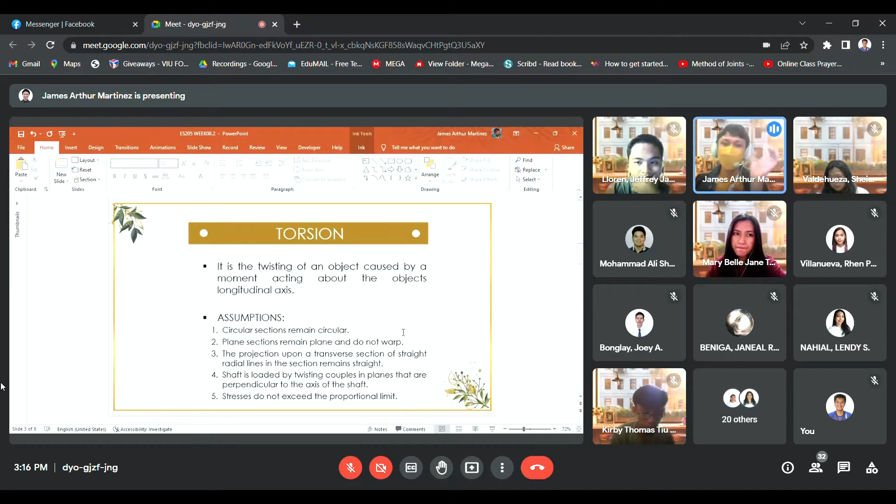So I'm about to present to you the equations and formulas that will be used in dealing with torsion problems here in engineering mechanics. Again, only circular cross-sectional area will we consider. Now we have here the angle of twist, which will be expounded later. I will show you a video with a very detailed explanation, crystal clear, with simulation.

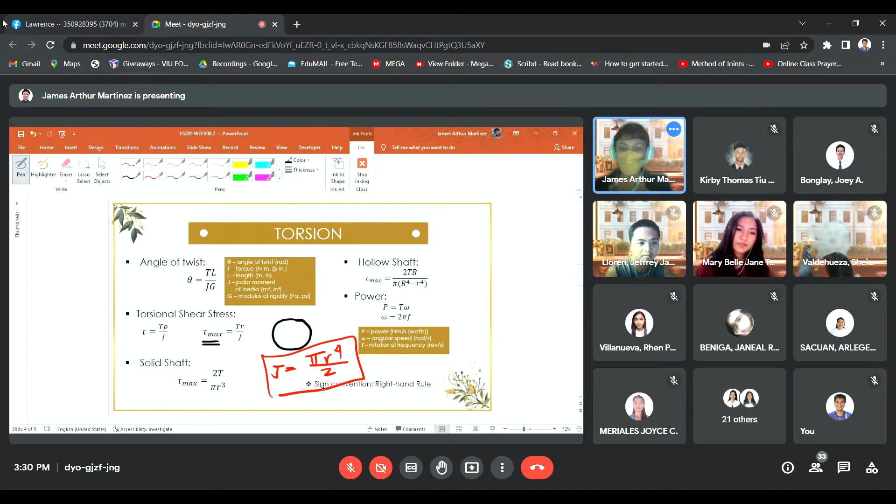Okay, so for sign convention, we will be using the right hand rule. Later I will show you what our sign convention is for this right hand rule. So for now, I will present to you the fundamental concept and principle of torsion, explained very clearly with a 3D simulation so it will be easily understood after watching this explanation. So let me just share my screen.

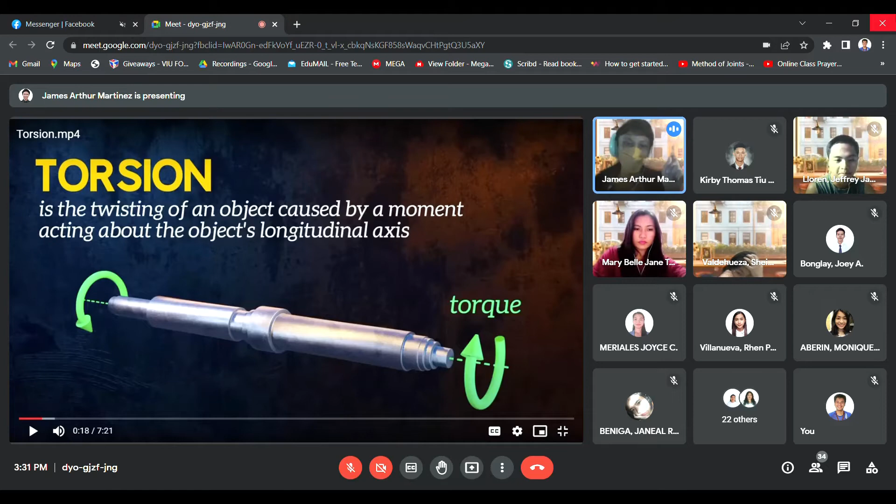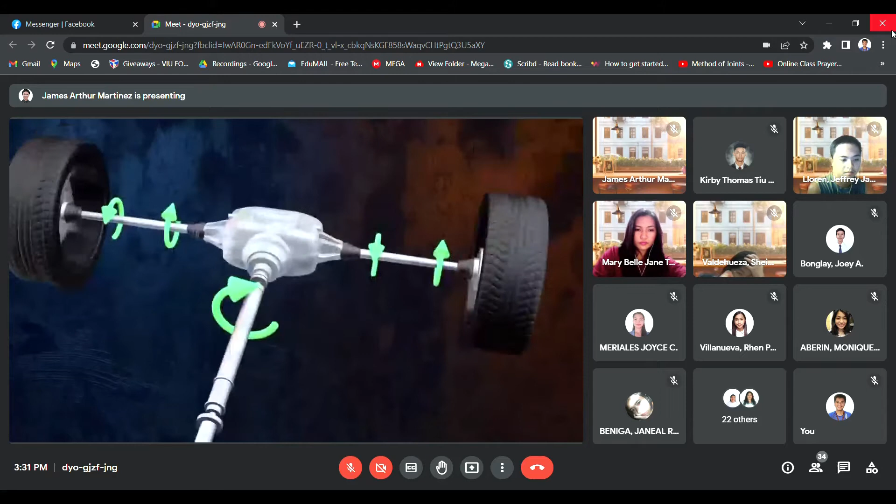...transmission shaft, which is used to transmit power by rotation. This could be the drive shaft and axles, used to transmit power from the engine of a car to the wheels, for example, or the shafts used to transmit power from the blades of a wind turbine to its generators.

Let's explore what happens when we apply torque to a circular bar. We can see that the applied torque causes the bar to deform by twisting. An interesting thing we can observe is that individual cross-sections of the bar do not get distorted by the twisting. We can imagine that the bar is made up of multiple individual discs, which rotate relative to each other when the torque is applied, but do not deform.

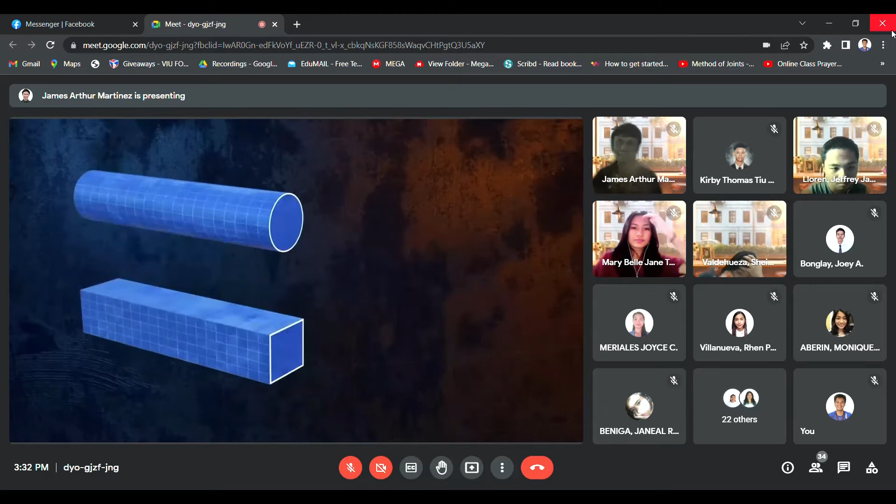This is only true because the cross-section of the bar is axisymmetric. A bar with a rectangular cross-section is not axisymmetric, and so torsion results in warping of the bar cross-sections.

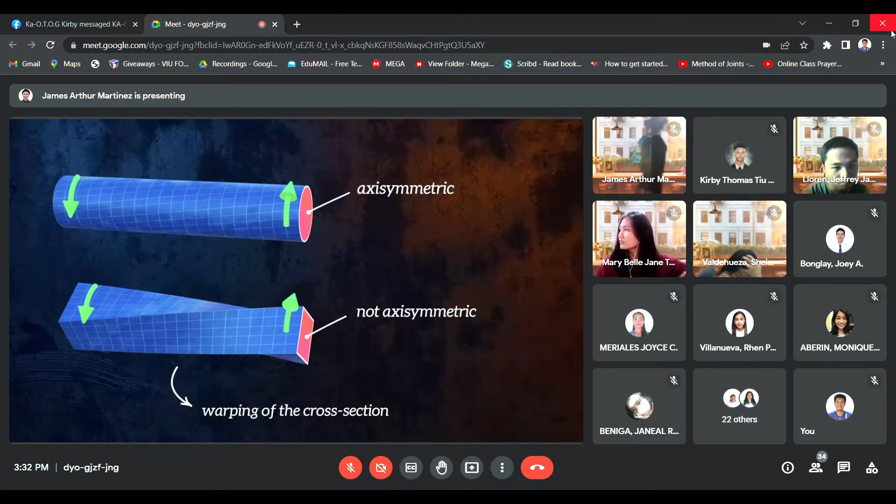This warping is complex, so in this video we will keep things simple and only consider torsion as it relates to circular bars. Let's fix our bar at one end, and track how a line between point A and point B deforms as we apply a torque to the other end.

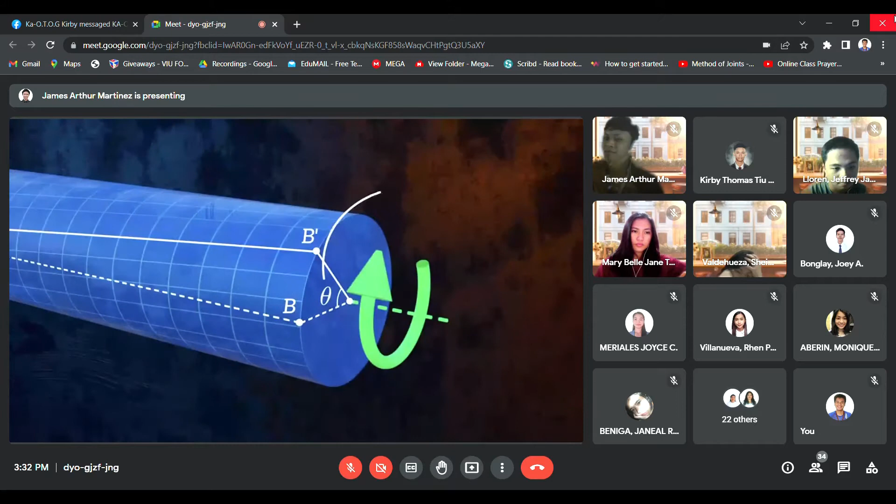The applied torque causes the free end of the bar to rotate by an angle theta. This is called the angle of twist. It varies linearly from 0 at the fixed end of the bar to theta at the free end of the bar. We can calculate the angle of twist using this equation.

It is a function of 4 parameters: the length of the bar L, the applied torque T, the shear modulus G, which is a material property, and J, which is the polar moment of inertia.

So, what is the polar moment of inertia? It defines the resistance of a cross-section to torsional deformation, due only to the shape of the cross-section. The polar moment of inertia for a hollow bar, with an outer radius RO and an inner radius RI, can be calculated using this equation.

Setting the inner radius to 0 gives us the equation for a solid bar.

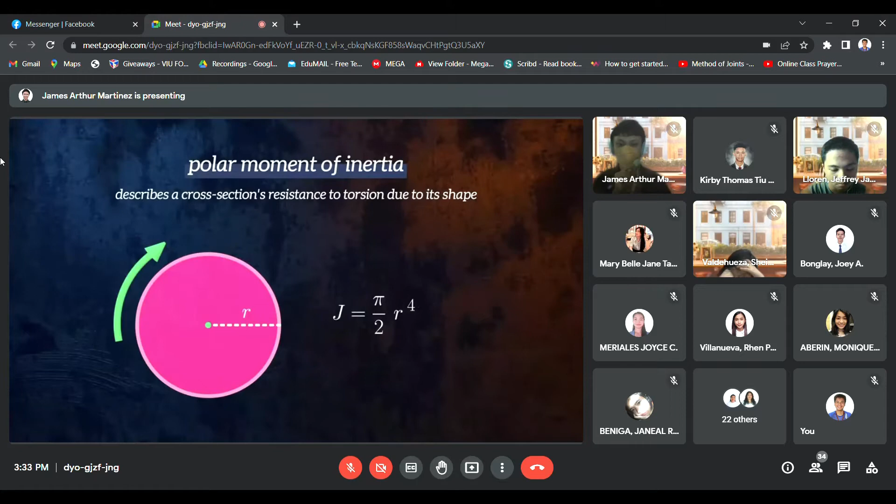One neat thing about the equation for the angle of twist is that it gives us a way to determine a material's shear modulus G experimentally. If we apply a known torque to a bar of known length and cross-section and measure the resulting angle of twist, we can use that information to calculate the material's shear modulus G.

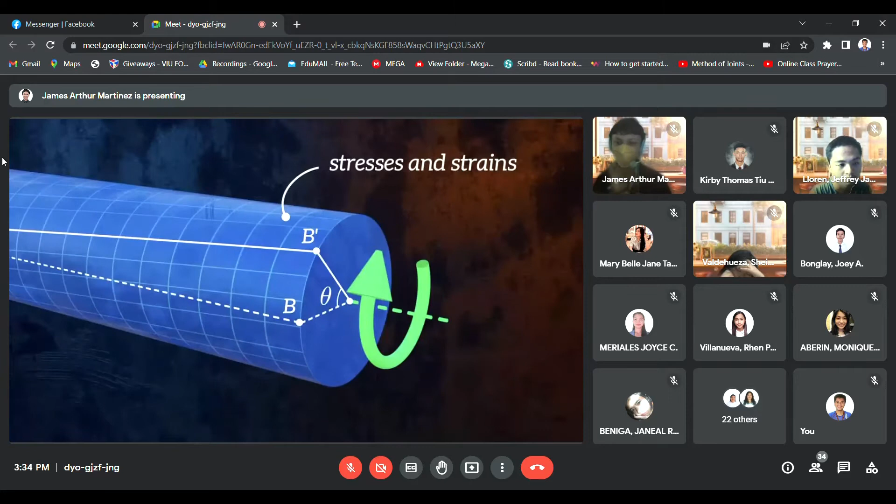Torsion generates stresses and strains within the bar, which we need to be able to calculate so that we can make sure our bar won't fail. To figure out how to calculate these stresses and strains, we can start by observing how a small rectangular element on the surface of our bar deforms. The element is initially rectangular, but when the torque is applied, it gets distorted.

Let's take a closer look. Because the bar is axisymmetric, we know that individual cross-sections will rotate but won't get distorted, so the sides CF and DE of the element will only move vertically along the lines shown here. After the torque is applied, the angles of the element are no longer 90-degree angles. This gives rise to a shear strain, which corresponds to the angle you can see here.

We can calculate the shear strain by considering only the geometry of the bar in the deformation. It corresponds to this angle between AB and AB prime. We can use trigonometry to derive an equation for shear strain. For small angles, gamma will be approximately equal to the tangent of gamma, which makes it equal to the length BB prime, divided by the length AB. AB is the length L of the bar.

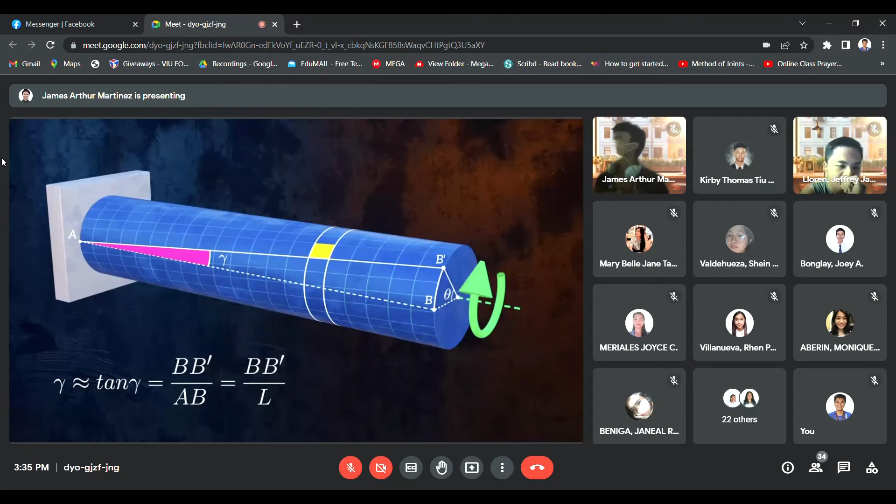We can calculate the length BB prime by realizing that it is the arc length of a circle with a radius r, covering an angle equal to the angle of twist, theta. So the shear strain is equal to the radius of the bar multiplied by the angle of twist divided by the length of the bar. But what about inside it?

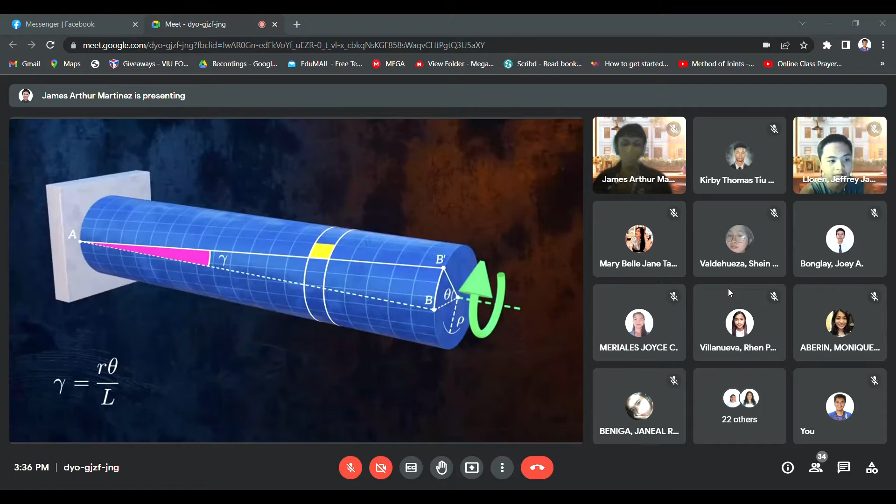It turns out that the shear strains increase linearly with the distance from the center of the cross-section. So if we define ρ as the radial distance from the center of the cross-section, we can replace r in this equation with ρ, to give us an equation we can use to calculate shear strain due to torsion at any point within the bar. That's shear strains covered. But what about shear stresses?

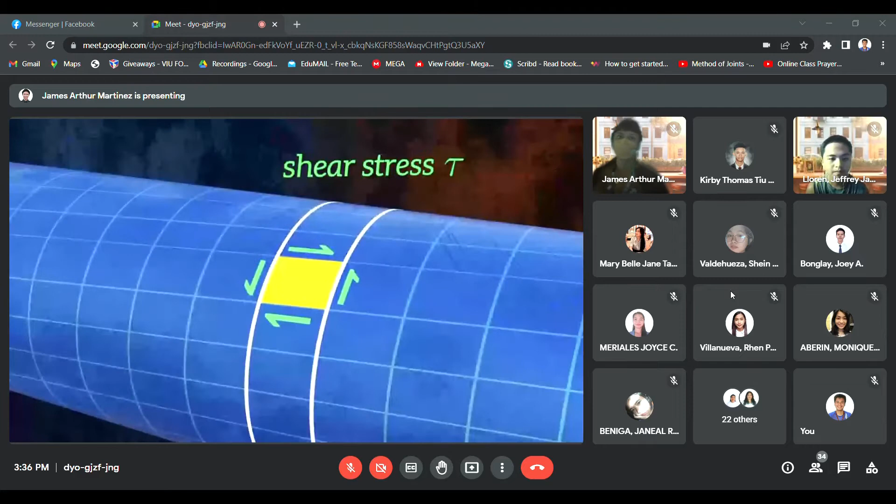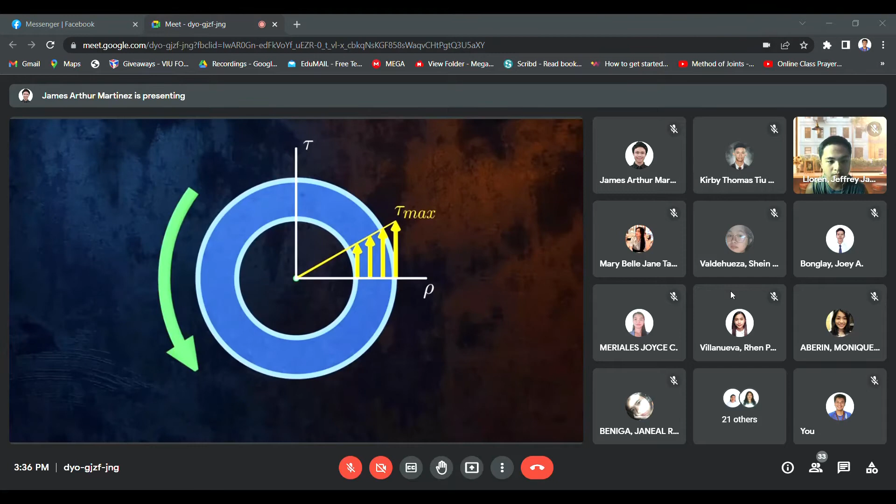Like the shear strains, shear stresses increase linearly with the distance from the center of the cross-section, with the maximum shear stress occurring on the outer surface, as you can see here. This is true for a solid bar, but also for a hollow bar. This is useful to know because it means that hollow bars are way more efficient at carrying torsional loads, since the central part of a solid bar is only resisting a small part of the total load.

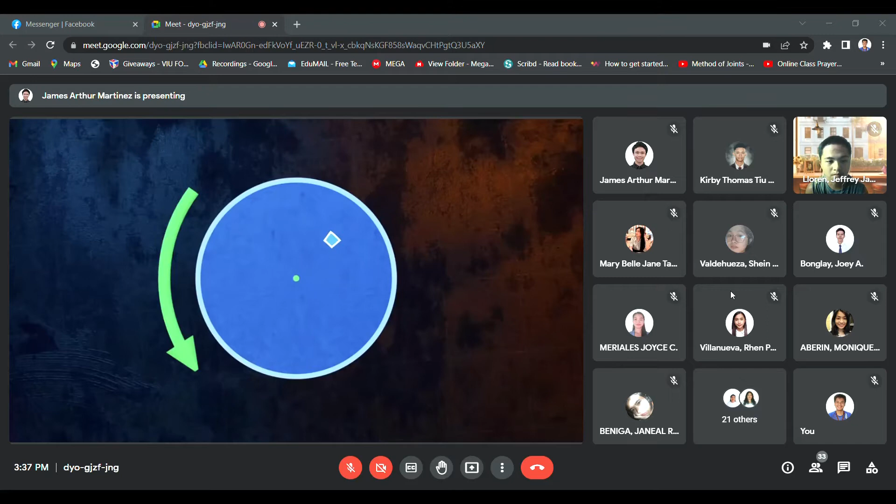Let's consider a small element within our cross-section that has an area equal to dA and is located at a distance ρ from the center of the cross-section. The internal force acting on this element is equal to its area, dA, multiplied by the shear stress τ. We can use this information to work out an equation for calculating the shear stresses.

The moments caused by the internal forces acting on all of the elements within the cross-section must sum up to be equal to the torque T. Otherwise, equilibrium is not maintained. We can represent that mathematically by this integral.

We know that the quantity τ divided by ρ is a constant, because the shear stress varies linearly with the distance from the center of the cross-section. So we can rearrange the terms and move τ over ρ out of the integral. It turns out that the integral we now have on the right is actually the definition of the polar moment of inertia, so we can replace it with the letter J, and we can rearrange this to get an equation for shear stress.

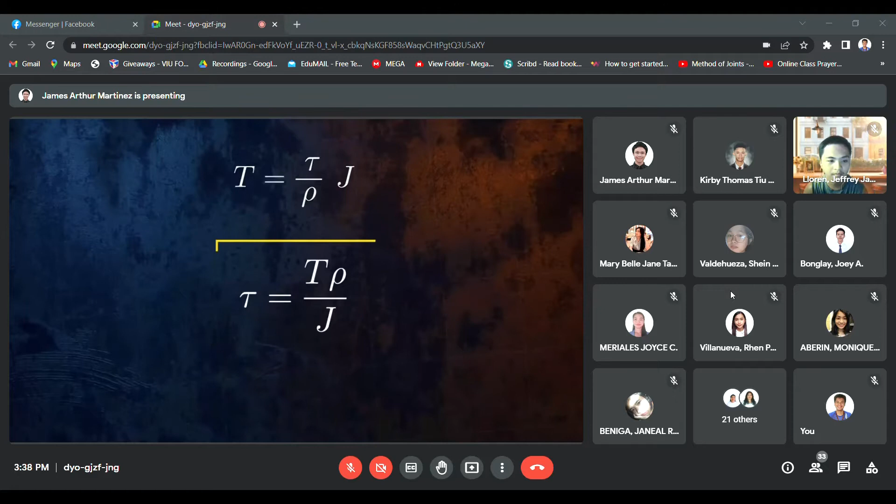The shear stress is a function of the torque T, the distance ρ from the center of the cross-section, and the polar moment of inertia J. It's quite a simple equation.

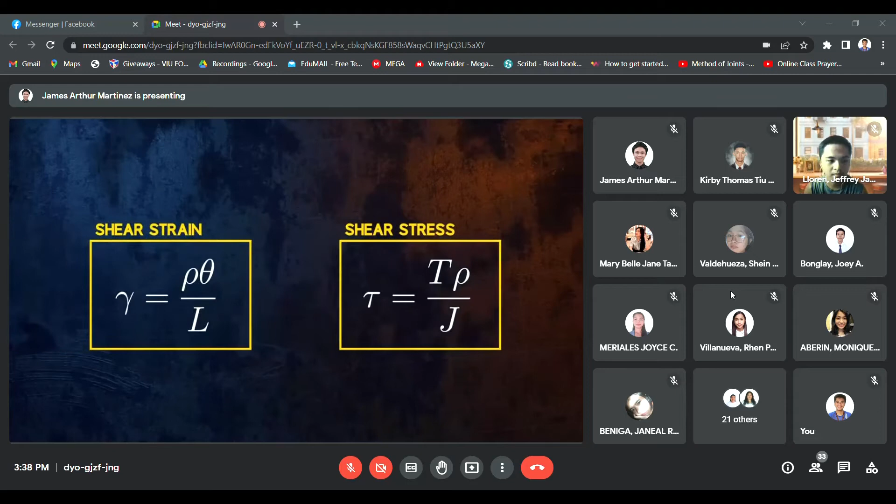So we now have equations that allow us to calculate the shear strains and shear stresses. We also have the equation for angle of twist that we talked about earlier. These three equations tell us everything we need to know about a circular bar which is under torsion.

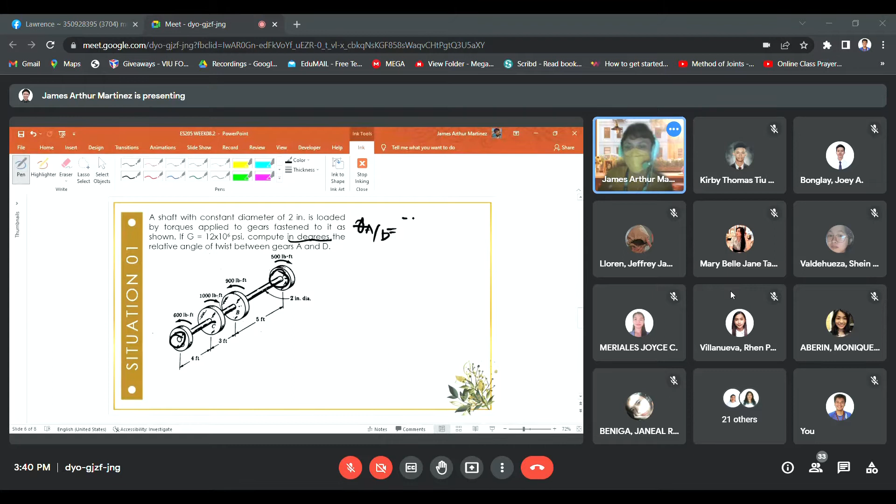So actually class, to solve for the relative degree or the relative angle of twist between gears A to D, we'll just have to sum up the angle of twist per segment. So meaning, angle of twist from A to B plus your angle of twist from B to C and your angle of twist from C to D. We need to analyze each of these. Then eventually, we will obtain the relative angle of twist between A and D.

Now, how do we find the angle of twist for segment AB, segment BC, and segment CD? Recall from our equations, we have an equation for the angle of twist, which is equal to TL over JG.

And since the solid shaft is constant from point A to D, constant is its area or cross-sectional area as well as its modulus of rigidity. So those are constant here class. The difference will only be in the angle of twist from each segment, due to its torsional stress or internal torsional stress and its original length. So first, let us draw the torque or the torsional diagram. Let me just add another slide.

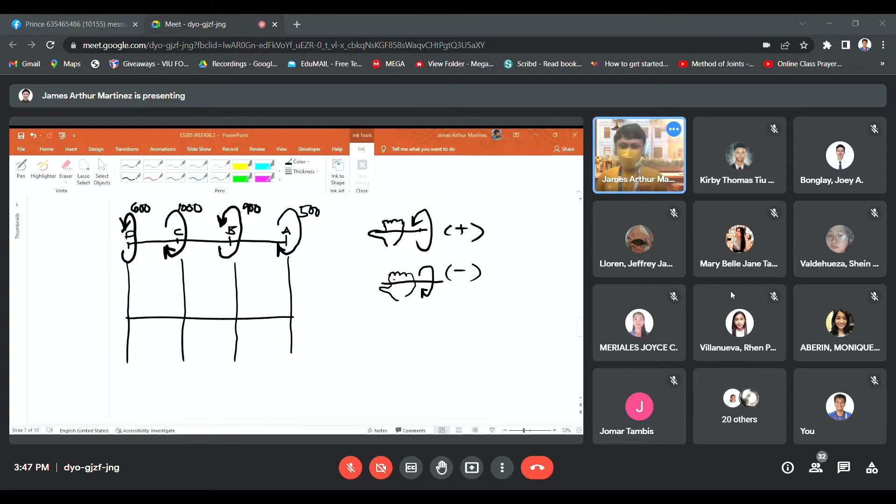Thank you. Okay. So, going back to the topic. So, I think that sign convention, meaning class is 600 pound feet na torsion will be unsa man, di ba, positive, no?

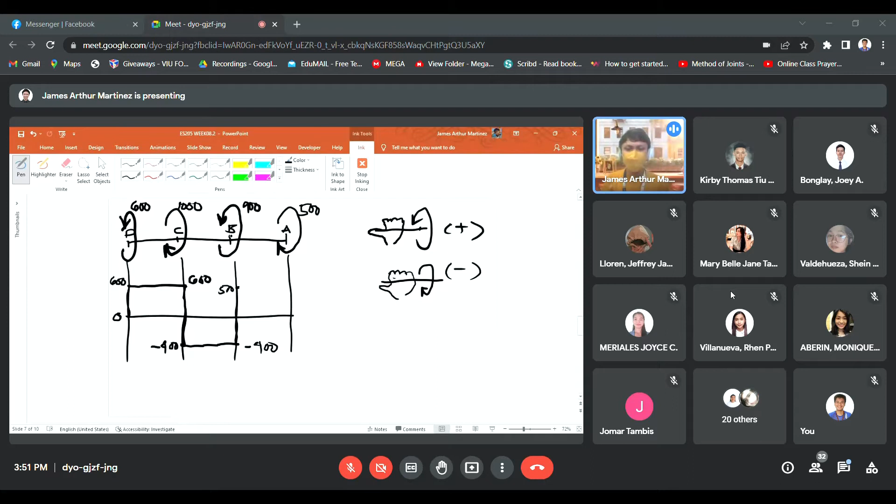The difference apart is 500. Meaning of the 900 plus, from this point to this point, it should be 900, right? So 500 plus 400 gives you 900. And again, there's no moment or torsion involved in your segment A to B, so it stays constant. And at point A, you have a negative sign convention of moment or torsion with magnitude 500.

And this is 500, so meaning it goes to zero for our torsional diagram. So you have to understand this class, because this is a very important diagram that we will use in our next topic, after midterm discussion, which is chapter 4 in the book. This will be our basis for the solution. So did you understand how this is created?

This is called a force diagram class, or rather torsional diagram, since torsion is involved here. This is just similar to the force diagram from our previous topics, where we solved for compound bars. We can actually graph the force diagram to express or determine the internal forces of your bars.

So meaning class, at member or segment C to D, your internal torsion is 600 pound-feet. And at segment B to C, your member is subjected to negative 400 pound-feet of torsional force, or torsional action. And also for member A to B, it has 500 pound-feet torsion, or internal torsion.

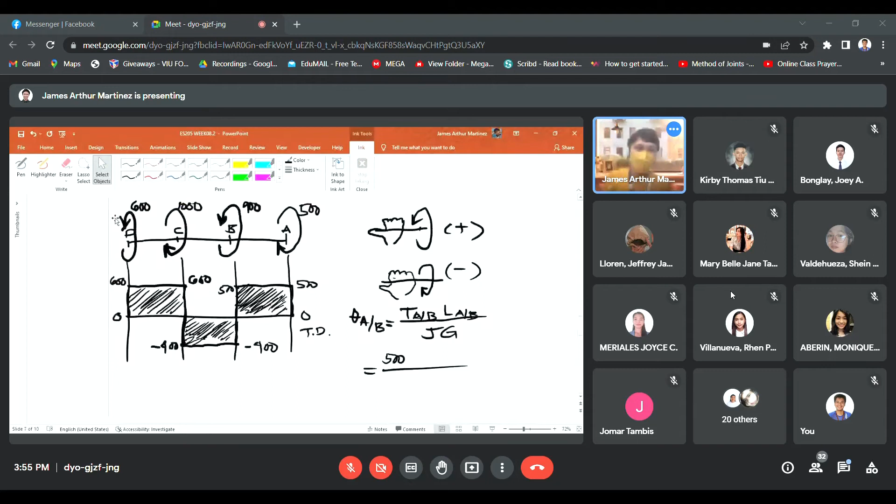So substituting the given data, the internal torsion of segment A to B is 500 pound-feet. Remember that for our units to be consistent, since our torsion is in pound-feet, we need to convert it into pound-inch.

So converting 500 pound-feet into pound-inch: since 1 foot equals 12 inches, the conversion factor is just to multiply by 12, and the resulting unit will be pound-inch. So we multiply by 12 so our unit is pound-inch.

Then for the length, for A to B you have 5 feet, so we convert into inches: 5 times 12, giving us inches as our unit. Then we have J, the polar moment of inertia for our shaft.

Our equation is pi times radius r raised to the 4th, over 2. So what is the radius of our shaft? The diameter is 2 inches, meaning the radius is 1 inch.

Then multiply by G, the modulus of rigidity, which is given as 12 times 10 to the power of 6 PSI, or pound per inch squared. This is compatible - inches here, and this also in pound-inches, since it's already converted.

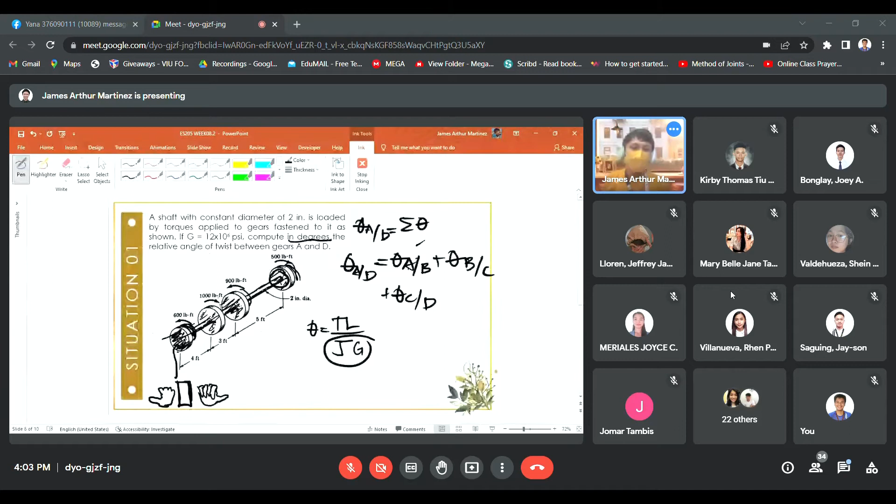600, again, naka-fit feet, pound feet na siya rather. So we'll convert it by 12 so it becomes pound inches. Then times the length of your member C to D, so 4 feet, di ba siya? So 4 feet, multiply this by 12, so magiging inches na siya.

So JG would be the same lang ani, kay constant lang ang ato ang cross-section. Sorry, this is not squared for the class, so kindly recalculate. This is raised to 4. Pi r raised to 4 ang polar moment of inertia. Times 12 times 10 to the power of 6. So pila lagi na siya, class?

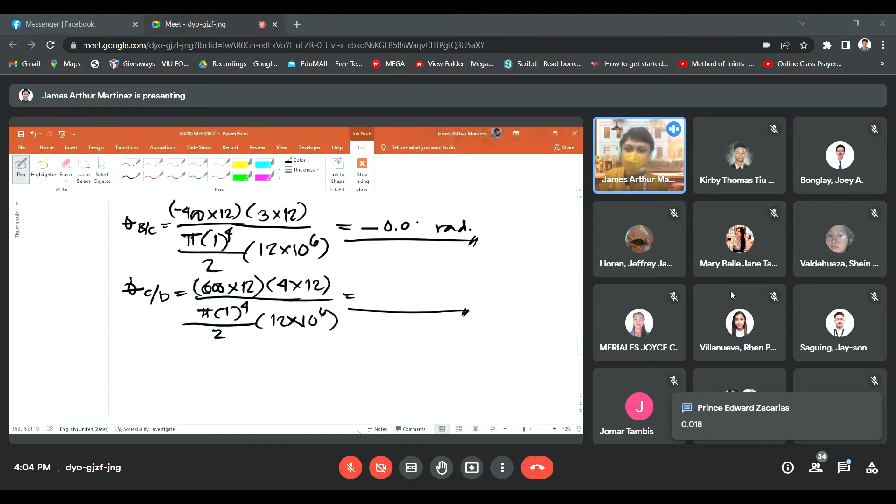Pila si B to C and si C to D? Asa man ni si 0.018 kang B to C? Same ra ang kwan ganyater B to C, 0.009 yater. Kani siya? Yes, sir. Yeah. Anyway, regardless kung pila pa naka-square is just 1. 0.009 to then 0.018 radian.

Okay, now, to determine the relative angle of twist of your gears A to D, ano lang class, di ba, summation lang of angle of twist of each segments or sections. So we'll sum it up. For A to B, you have 0.019, minus for B to C, so negative man siya, minus 0.009, plus C to D is 0.018. So how much is this?

18 point, 18? 0.028. Okay, you have 0.028. So this is in radians, di ba? So this is actually the angle of twist of your shaft from A to D, but in radian.

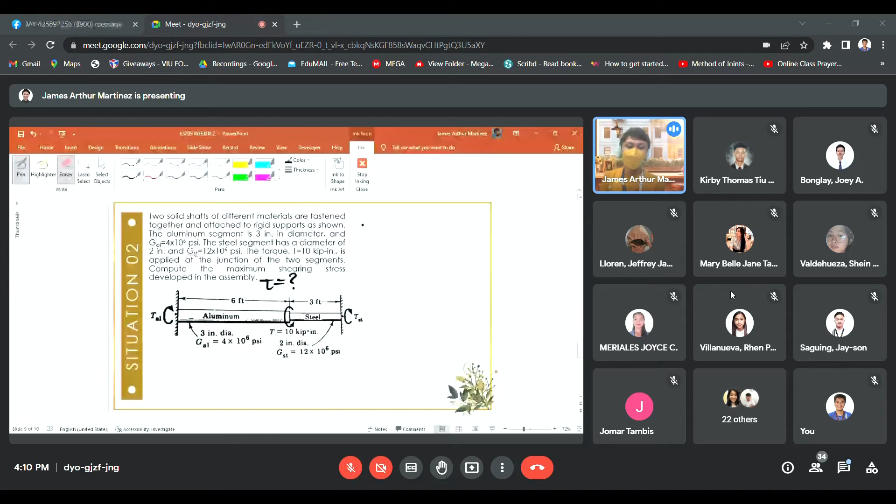How many available independent equations of equilibrium can we use in this case? It's very evident that we cannot sum up forces since there's no force involved. The actions or loads applied to our member are actually in moments, torsional loads, meaning we cannot use summation of forces in x and y axis. So the only independent equation of equilibrium we can use in this problem is the summation of moment, which should be equal to 0.

Why do we equate this to 0? Because this is to obtain or achieve a static equilibrium state in our material. If you have a resulting moment, meaning the structure is not really stable, there will be movement happening. So to maintain and obtain static equilibrium of our material, the resultant moment should be equal to zero.

Okay, so summation of moment equal to zero. By right hand rule, we just assume our reactions or reactive moments at supports for the aluminum in this manner, opposite the torque acting on the junction. So the support will just resist it. The concept is the same as before.

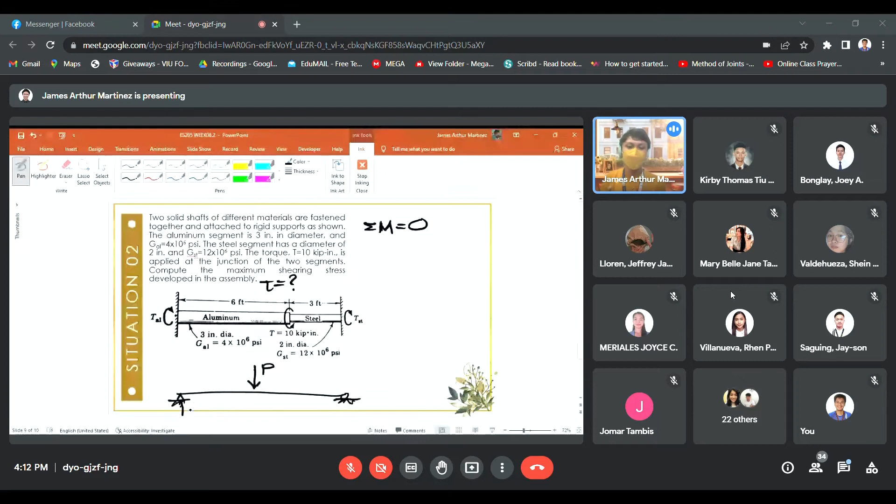When you have a simple beam, right? So it's like we're getting a reaction actually, it's just that here it's in terms of moments that we're resolving. So when you have a force P, how do you compute or what's the automatic assumption for reaction at supports, upward right? What's the relationship between your P and the reaction?

It's just that it's opposite the direction of your load applied, right? And of course when you have a support, the purpose is to resist that load. So opposite in direction lang. This is the concept we adapt here. So you actually assume the direction of your moment at supports. It's just that in this problem it's given directly.

But if it's not given, class, assume the direction of your moments at supports, which is just opposite your torque applied at the junction. Okay, so applying the right hand rule, class.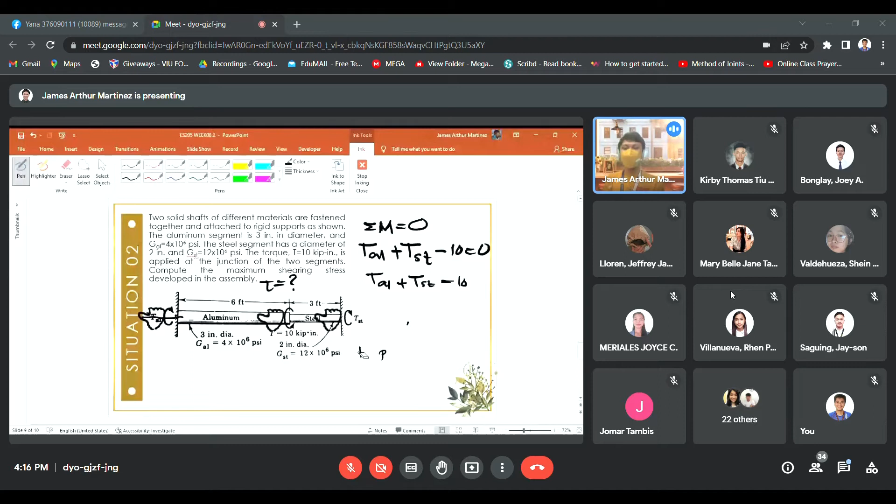To do that: 1 kip is equal to 1,000 pound-inches. So we just multiply it by 10 to the power of 3. So this is now in pound-inches.

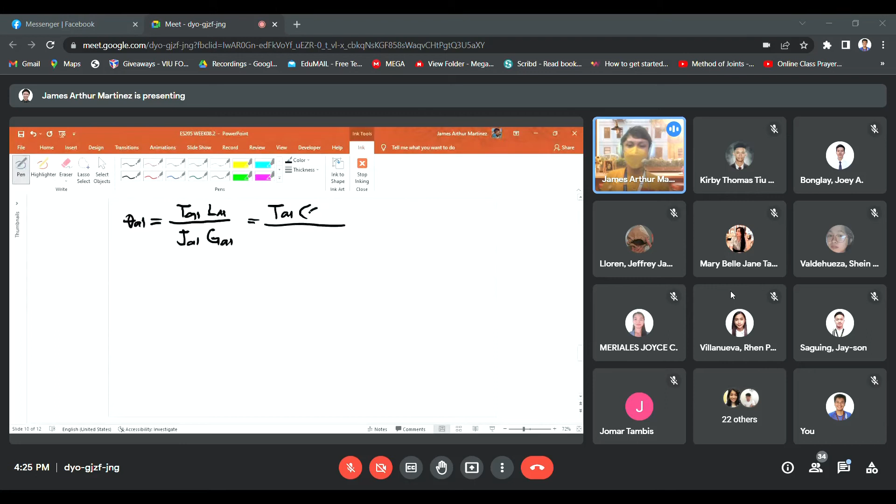So the internal torsion of your aluminum times the original length of your aluminum, over the polar moment of inertia of your aluminum and the modulus of rigidity of your aluminum. So substituting the necessary data into our equation, the unknown is our internal torsion in material aluminum, times the length of the aluminum. The length of aluminum is 6 feet, so again we convert this into inches, multiply by 12 inches.

Over the polar moment of inertia of your aluminum. The polar moment of inertia of a solid shaft is pi times radius to the 4th over 2. The radius for aluminum, the diameter is 3 inches, meaning the radius is 1.5. So 1.5 raised to the 4th, all over 2. Then the modulus of rigidity for aluminum is 4 times 10 to the power of 6 psi.

So how much is our angle of twist for member aluminum, in terms of the internal torsion of aluminum, TAL? So how much is that? 6 times 12, all over pi times 1.5 raised to the 4th, over 2, times 4 times 10 to the power of 6.

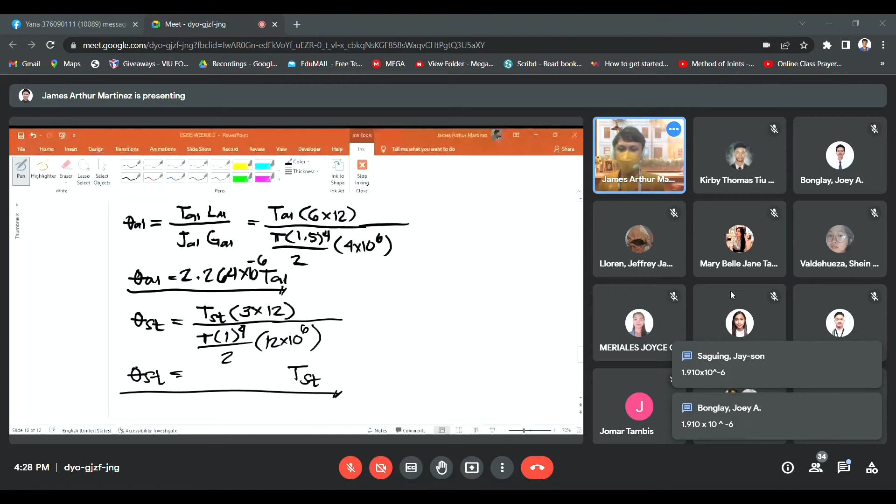1.910 times 10 to the power of negative 6 TST. Now, didn't we have an expression for our angle of twist?

For both materials, aluminum and steel, we also have this relationship for their angle of twist. So let's equate both equations and expressions. The angle of twist for your aluminum is equal to the angle of twist in steel.

Therefore, 2.264 times 10 to the power of negative 6 TAL is equal to 1.91 times 10 to the power of negative 6 TST. So it doesn't match exactly, so let's just combine it, class, times 10 to the power of negative 6. Okay, so let's express the internal torque of aluminum in terms of TS, meaning divide both sides by 2.264 times 10 to the power of negative 6. So you'll have how much, class?

So therefore this is the internal torque of aluminum: 0.844 internal torque of steel. So that's now the relationship, class, of your internal torsion between both materials. Now notice that this expresses the internal torsion of aluminum in terms of the internal torsion of steel.

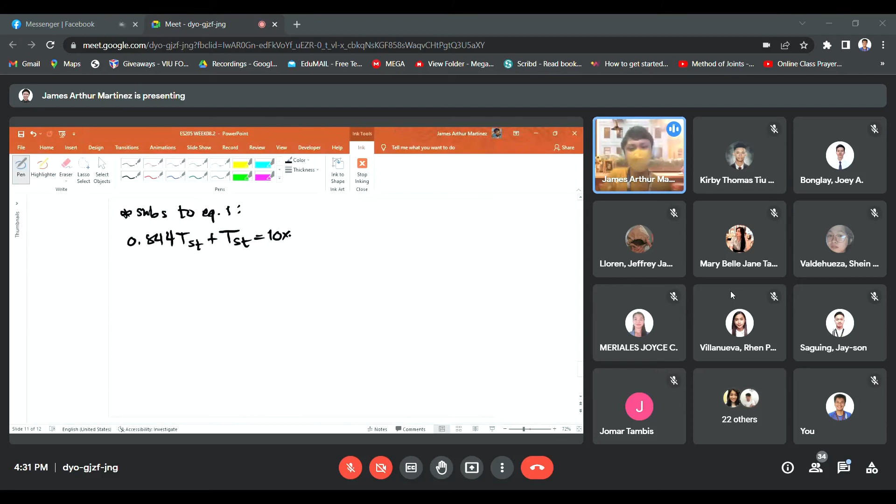So, substituting the expression of your aluminum into equation number 1, you have TAL plus TST. So TAL is equal to 0.84 TST, plus TST, is equal to 10 times 10 to the power of 3. So how much is your internal torsion, class, for steel?

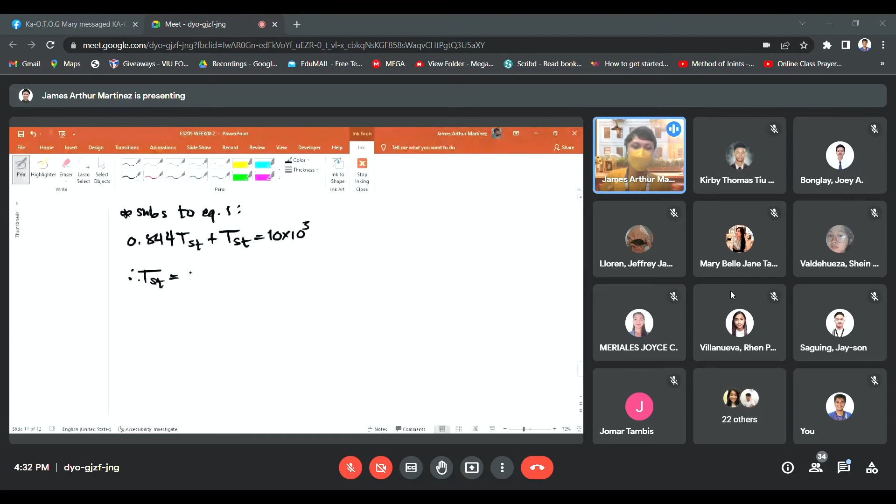5,422.993. So what is the resulting unit for this? This is in PI, or pound-inch, and since this is torsion, it's pound-inch also.

I won't box this yet because this isn't the final answer, since what we're looking for here is the maximum shear stress. So it's not yet shear stress — these are just your internal torsional stress or torsional action, the load on your member or your structure. Now we have the internal stress or internal torsion for steel.

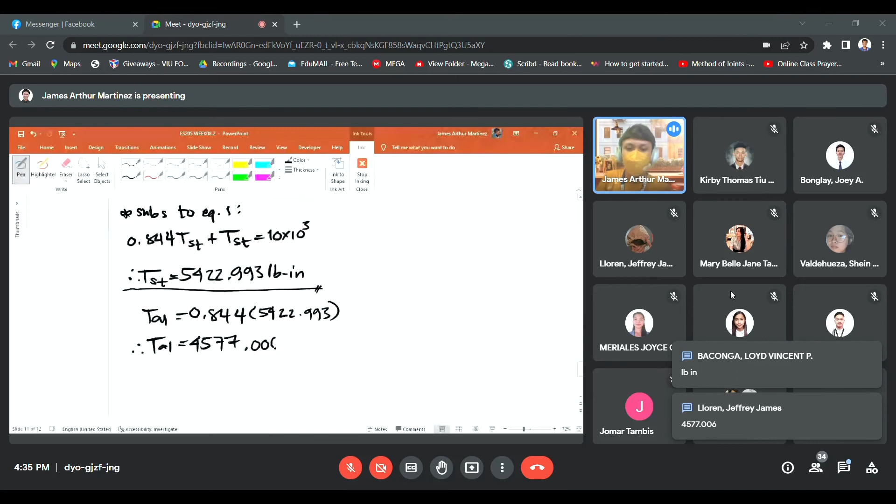Okay, now we're not yet done because again, what we're looking for is the torsional shear stress and maximum shear stress. So for steel, I'll label this as T-max of steel, which is equal to this equation, TR over J — that's now the equation for maximum shear stress or maximum torsional stress.

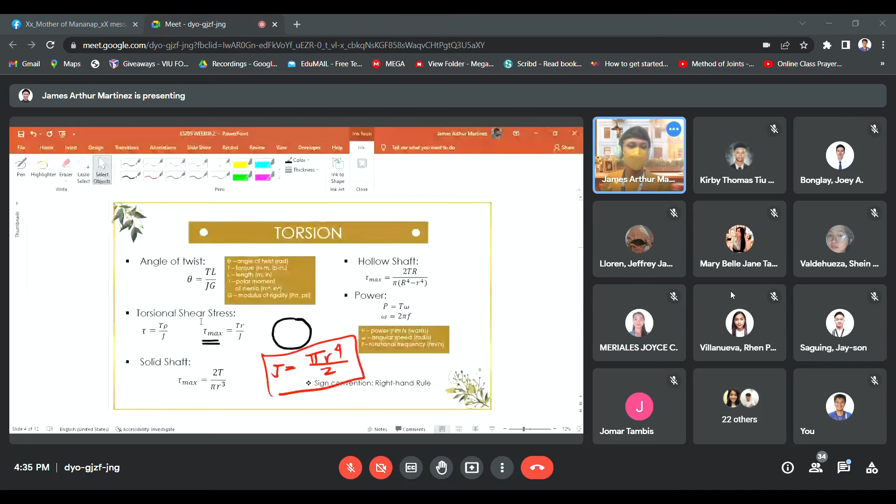Okay, that's it, class. Or you can actually directly use this one, since this is a solid shaft, so that's fine too. But for me, it's more convenient to use the one I'm used to. But you can also use that derived equation.

So this is R. So for steel, you have TST, 5,422.993, times the radius of your steel — 2 inches is the diameter, meaning 1 is the radius, so it's just 1 — all over the modulus of rigidity... the polar moment of inertia of your steel section, which is circular, so pi r, 1 inch is the radius, over 2. So how much is the maximum torsional shear stress for steel?

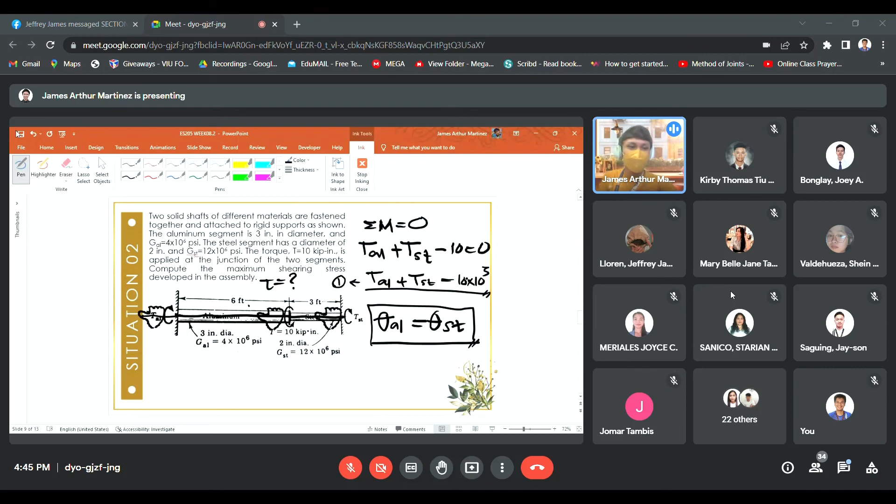So ang sa ato kato ang solution, sa akong solution, this is the very on point, kay wala man tayo round up kay disipan places lang man. Pag imo na siyang i-add, pila man ni class, kindly add 5,422.993 plus 4,577.006. Pila man siyang result.

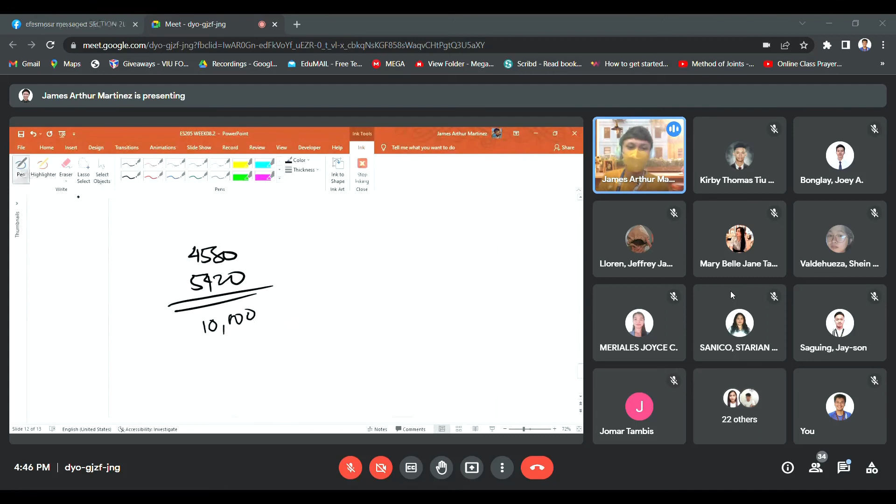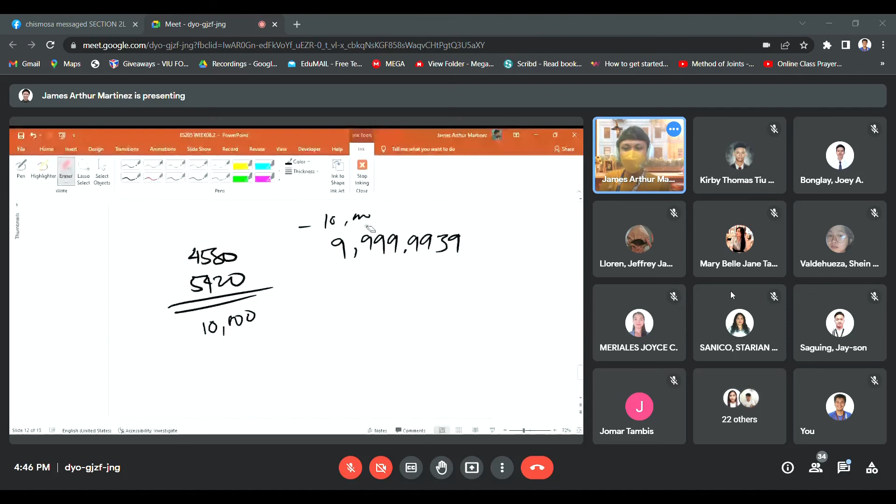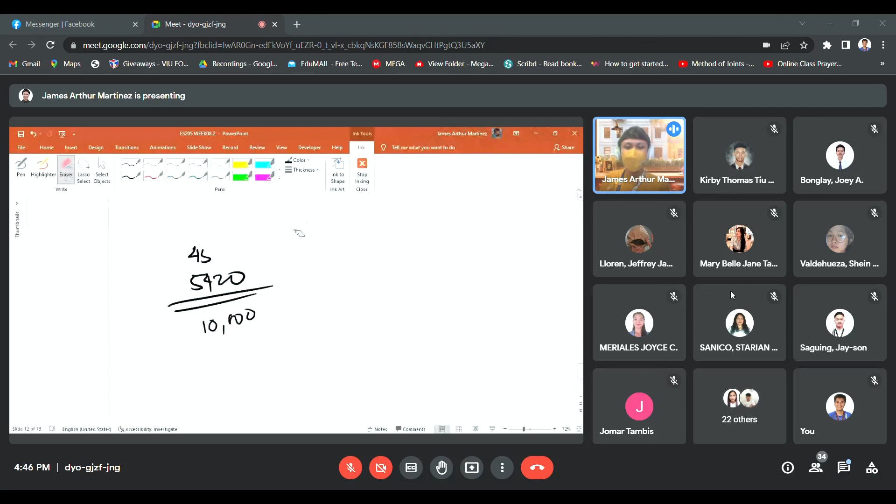9,999.93 sir. Okay, so 999.993? 939 sir? Yes sir. So anyway, isa ra pa natay kon, sir, discrepancy. If ilas na to na siya by 10,000, dare, so 93, so it's only a matter of 0.07, tama ba? Para mag 10,000. So if ato ni siyang i-kuan class, ang sabot mo kay nag-play safe siya para ma 10,000, so ang ihabit tong torsional diagram, kay if ato na siyang i-graph, asa tong figure.

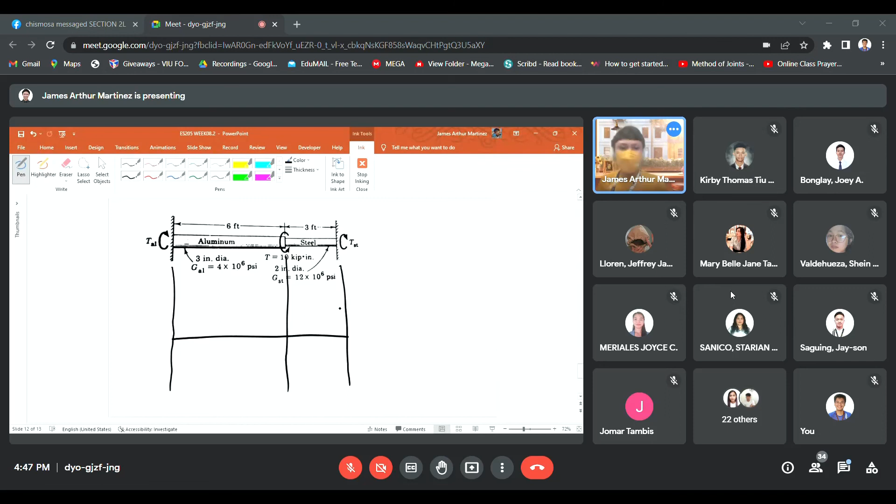Di ba I have mentioned earlier na dapat mag-zero ang imuhang torsional diagram. So, if atong i-draw iyahang torsional diagram, ang sabuk perfect zero gina ang iyahang graph, no? Kay iya magipang round up, round off. So at aluminum, di ba positive sign convention ta ani? Kung right hand rule atong convention is right hand rule man, no? So positive sign convention, so value of your...

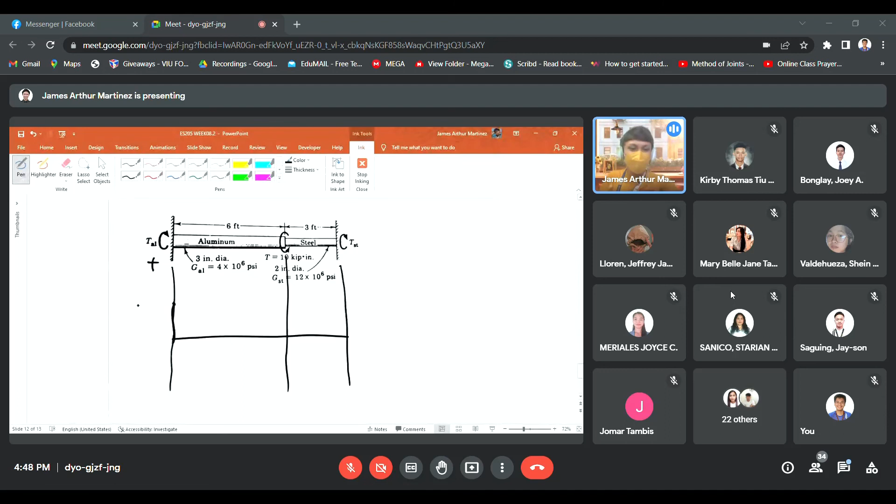4,577. Sige, so meaning musakan na siya by 4,577.006. Then again, wala'y portion or moment nga nag-act sa ato ang member in between junction. So, constant lang na siya all throughout. Meaning, this is also 4,577.006. Now, then, pag abot kang junction, no?

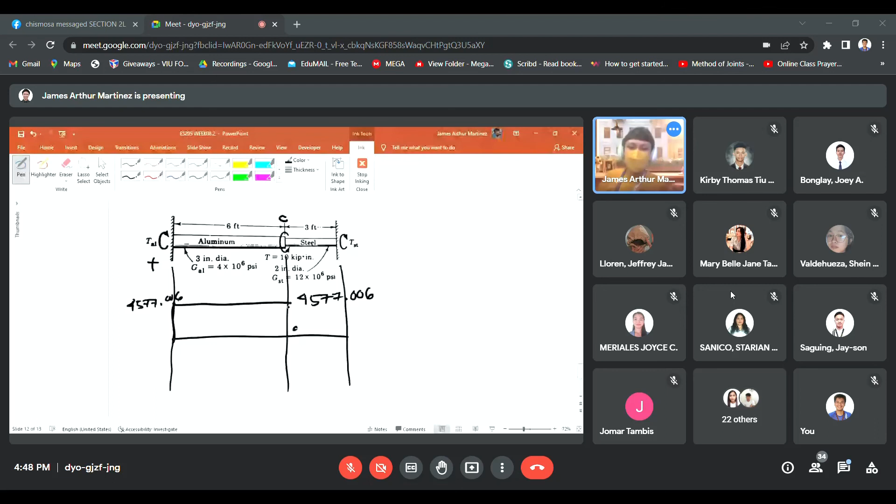Sige, i-name na to siya at junction C. So, at point C, you have a negative sign convention of torsion. Meaning, mo go down, tanong mo naog ta. So, 4,577.006 minus 10,000, kay this is in 10 kip inches man. So, and these are pound inch, so ato siya i-convert into pound inch, no? So, 10,000 na siya.

4,577.006, you'll have negative pila man. Sige, class, pila man ang 4,577.006 minus 10,000? So to, sir? Pila to? Negative. So, of course, that should be negative kay mas tako man ang magnitude sa tong 10,000, no? Negative sign. So, negative 5,422.994.

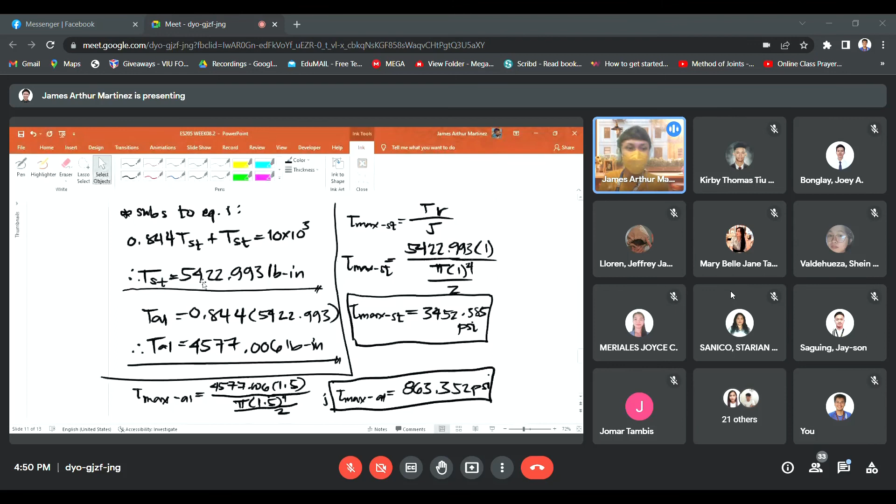Sige, negative 5,422.994. Okay? So, meaning, again, for the point C, still support, ano? So, constant lang. So, meaning, at that point or at support sa steel, you also have negative 5,422.994, no? And ang TST, how much? So, 5,422.993. So, okay. So, 0.001 lang ato ang discrepancy. So, mag-close lang hapon ang siya class, no?

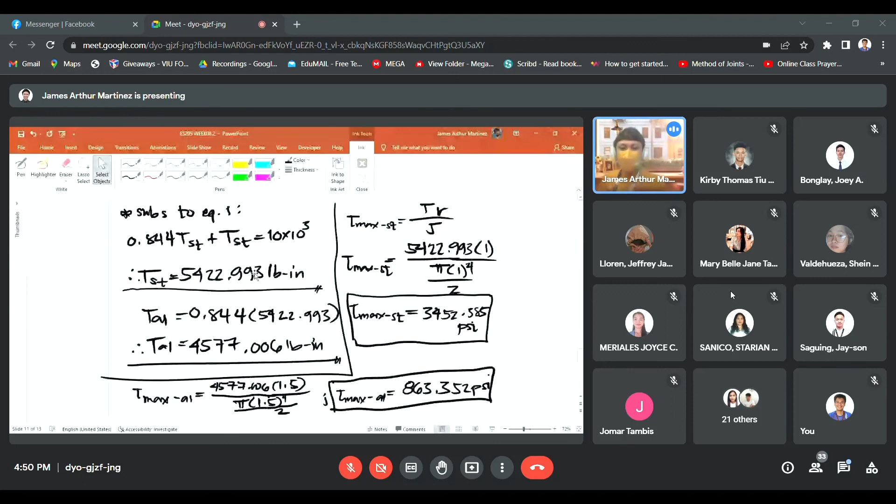Ang importante class is that pag mag-drawing ka of force diagram or torsional diagram or shear and moment diagram class, no? Perfect if equal to 0 gyud siya, no, nga 0.000 or 0 gyud. But due to decimal places bitaw class, no, nga discrepancy in which ikapila na ta nag-round, no, from here nag-round up ta, from here nag-round up ta, dari nag-round up ta, asa pa man diri nga part round up, di ba? Daghang kita gitang round up. That's why muna siya ang na accommodate no, na accumulate nga discrepancy. But anyway, this is not sayop, no? This is also acceptable or this is actually correct. It's just that unsa man ni murag siya na itsura og ilong sa baboy.

Okay ra ya ko na siya, no? Actually, hangtud 0.9, okay na siya. So, if nakakuha ka ng discrepancy nga 0.5, ambot, okay na siguro, okay na siya, acceptable na siya, no? Mga 0.8, kana class, dako na ni sila, no? So, all you have is recheck, i-retrace ang imuhang solution base na lang kay nadakuan og round up ba, no? Or na lang kay nasayop og input, okay? Basta ang acceptable class, it should be a very little lang yun nga discrepancy.